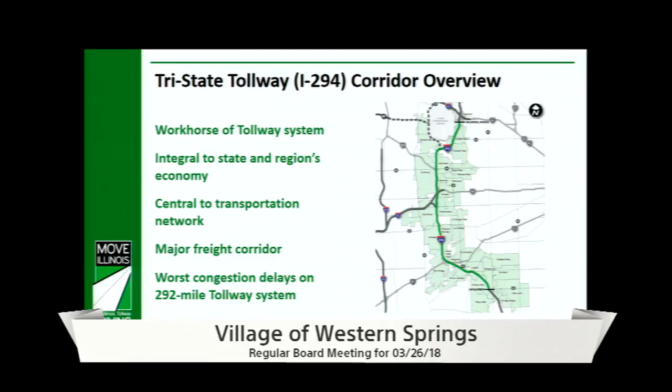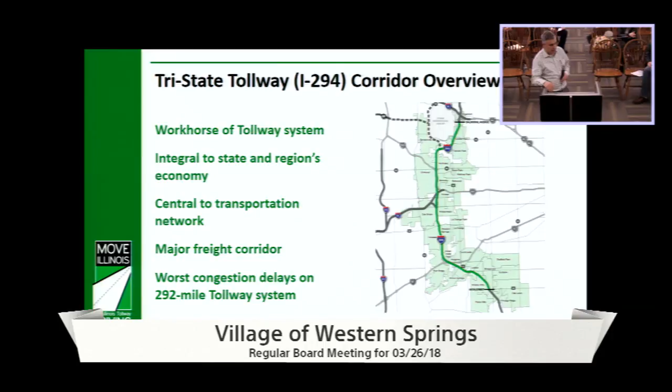You may have heard me say this before, we've done a couple different presentations. This really is the workhorse of the tollway system. This Interstate 294 is by far the busiest road that we have on the entire tollway system. It's really integral to not just the tollway but also to the region, as growth continued to happen, post-war growth continued to happen further and further west. This road really became the lifeline to a lot of different communities, connecting up Midway at the south end, O'Hare at the north end. We've got multiple rail intermodals up and down the entire corridor, I believe 4 different rail intermodals. It's definitely very important and integral from an economic development standpoint.

Outside of the city of Chicago, you've got some of the biggest job creators right along Interstate 294, with Oak Brook, Rosemont, everything near O'Hare Airport and Midway Airport as well.

So very integral to the economy—major freight, with all the freight and the airport through there, it also carries the most amount of trucks that we have on the entire tollway system. So we carry the most amount of passenger cars, the most amount of trucks, and with that we come with the most amount of congestion that we have on the entire tollway system.

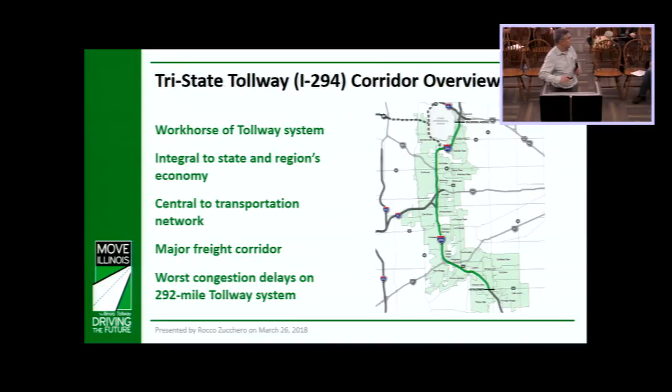So as we started out our planning process, the Tollway Board of Directors, we created a corridor planning council group that got a lot of feedback. The Western Springs was represented on that group. We got a lot of feedback about things that we should be considering as we move forward with the project. Our Board of Directors gave us direction to move forward with a project to look at the long-term vision and long-term solutions of what this corridor is today, but then also what it can be in the future to make sure that we remain vibrant and healthy and support the economy and freight that moves through here.

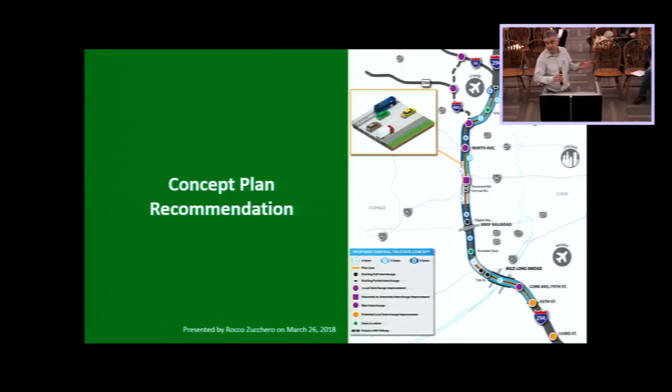So I'll speak to our recommendations that we had on the corridor. I believe this document, or some form of it, is on your website now—it's been out there for a little bit. As we went through the planning process, we wanted to make sure there's the right size solution through here, so it wasn't a one-size-fits-all approach. It's a 22-mile corridor, so there's a lot of different projects within the overall project. I'll try to speak to the whole—I know we try to show a lot on a small picture here, but there's a lot of things happening through here.

The overall project timeline, which I'll hit on later, is from 2018 through 2025. Again, a lot of different projects throughout the entire 22-mile corridor. Throughout construction, we're going to maintain 4 lanes of traffic. That's very important—we don't want to impede the flow of traffic and shift more traffic onto your local roads, the parallel roads through here, Wolf Road, LaGrange Road, and further to the west, 83. So we want to make sure that during construction we maintain 4 lanes of traffic. That really drives the way we have to think about the project as well.

So what we have on the screen is the number of lanes that we're recommending. We worked on adding capacity where it's needed. We worked with CMAP, the Chicago Metropolitan Agency for Planning, the regional planning body, to really look at travel demand and forecast what's out here today, but then also look to the year 2040, 20 years beyond, at what the traffic demand might be, assessing some of those changes. So we came up with recommendations on the number of lanes based on these traffic studies.

But there's also some other projects that drove our thinking. This is a major regional project—we are doing significant improvements at the Interstate 290, Interstate 88, 294 interchange. That's the interchange that just flat out doesn't work; it's where a lot of daily delay happens. It's where trucks basically sit in a U-turn movement—they have to go northbound, U-turn, south, climb. It's a mess for them. The I-88 to Interstate 294 connection is another one that really doesn't work very well. We've got a lot of weaving that happens that really backs up traffic, miles long of backup. So that's a big component that drove our overall thinking as a major investment to fix the I-88, 294, I-290 interchange.

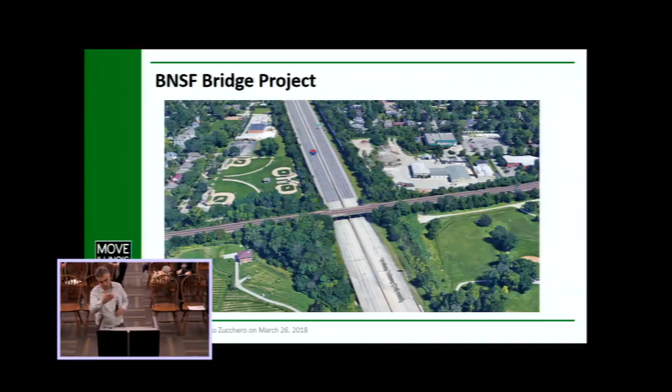That's something we've heard from other communities next to us. So it's an opportunity now to work with the residents to put something back that's more representative or reflective of their concerns. Thank you for that clarification.

Sure. Yeah. Yes. You mentioned the stretch from I-55 to the airport - which end will you start first?

The plan right now is in 2018 - 2018 to 2025 is our overall timeline. I was going to hit this at the end, but I'll jump into it now. We plan on doing 22 miles, with a lot of complex projects in between.

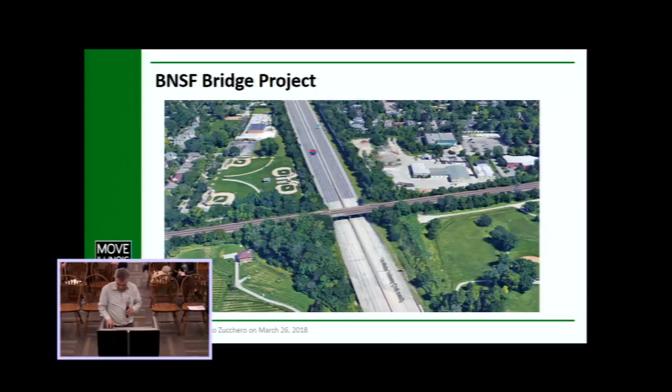In 2018, we intend on working on the stretch from basically North Avenue or North Lake up to the airport, to tie in with our Elgin O'Hare, the 490 interstate through there. So you'll start seeing some activity up at the north end.

The next projects that will start, which help facilitate the rest of the construction, will be the Burlington Northern Bridge and the Mile Long Bridge. Those two elements of the overall 294 project have to get done first to allow us to hit the main line. Throughout construction, we're going to keep 4 lanes of traffic open.

To do that, right now Burlington is the narrowest opening - there are no shoulders, or very minimal shoulders, on either side, so maintaining 4 lanes of traffic there is impossible. Before we can hit the main line portion of 294, that Burlington Bridge has to be replaced. The bridge opening has to be sufficient to allow future travel through there, and also to allow us to shift traffic on either side of the bridge.

The other project that's like that is our Mile Long Bridge. If you're familiar with that, it's the big bridge that goes over basically everything - there's a whole little city underneath, including the Burlington Northern facility, UPS, a bunch of businesses, the Des Plaines River, the I&M Canal, the Chicago Sanitary Ship Canal, all kinds of stuff down there.

So that bridge down at the south end is also a multi-year project. It will be very interesting how we approach that project. Through that area, the road is shifting slightly to the east, because that had less impact on the facilities down below.

We will be building an entirely new bridge off of the tollway system today, to the east or north of where it is today. Once that bridge is built, we'll shift traffic onto it, build a new southbound bridge, and tear the old one down. Once the Mile Long Bridge and the Burlington Northern bridges are done, that allows us to start working on the main line, kind of north and south, in a couple different areas.

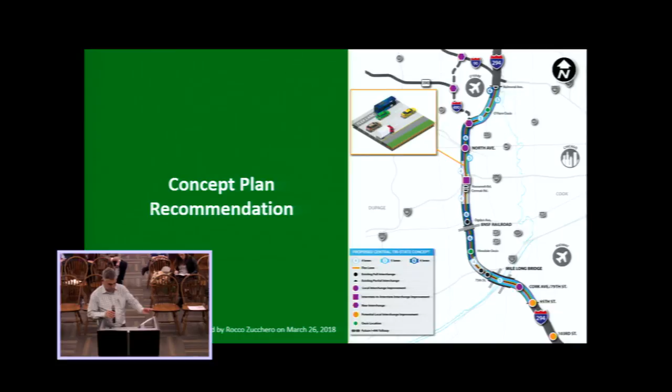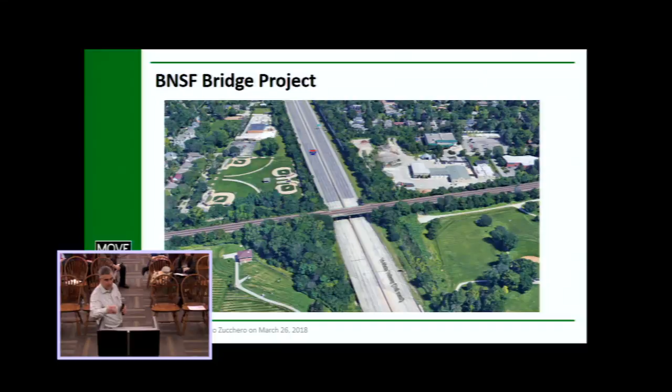So again, we'll spend some time. Dan will walk through the construction staging on the Burlington Northern. Then I'll get back to it and we'll talk a little bit about the impacts, the right-of-way and easement needs through this. Thanks, Robert. Dan?

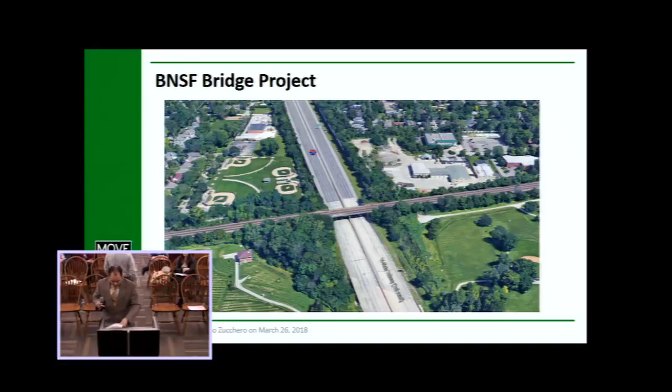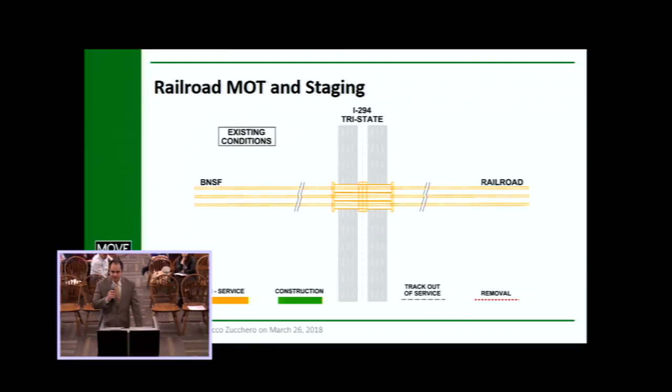Everything's working. All right, thanks Rocco. Again, I'm Dan Felice, I'm with Bowman Barrett & Associates, and our firm, along with many of our sub-consultants, make up the engineering team for the BNSF project that Rocco's been providing the overview on.

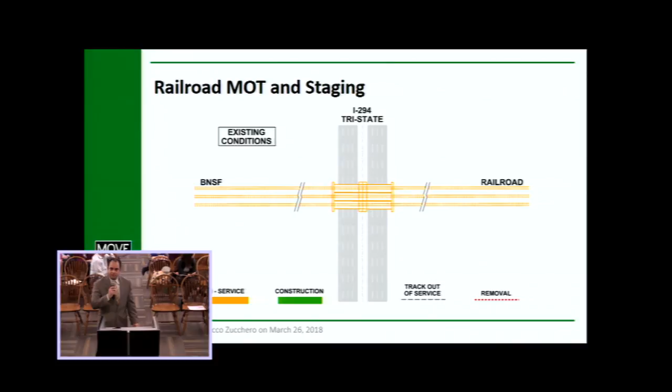Throughout the process, we've been coordinating with the BNSF Railroad, and they've indicated that 3 tracks need to remain active at all times during construction. That is to limit impacts to the commuter rail. We have Metra and Amtrak that use the line, in addition to the BNSF freight lines as well. So this requires multiple stages of construction to occur in order for us to complete the process. We'll go through the steps of these.

The first step is, in order for us to do anything on the current existing track alignment, we need to move the tracks to a temporary position, which we're calling the shoofly alignment. So step 1 would be, we would construct a bridge on the south side of the existing bridge, and place the embankment to allow us to place the tracks on a temporary location. Step one is looking at fall of '19 to about mid to late summer of '20 for that preparation of the shoofly alignment.

Then step two would be the BNSF forces coming in, and they would install the tracks on the shoofly alignment. After the track is completed, we would shift traffic one by one, taking tracks out of service during temporary off-peak hour or weekend time frames, and switch the tracks from the alignment beyond the bridge towards the end of our project limits, connecting them to the shoofly alignment. At the end of stage two, all train traffic will be using the shoofly alignment. The BNSF forces for step two would complete this work from mid-late summer of 2020, where step one ended, to about the winter of 2020.

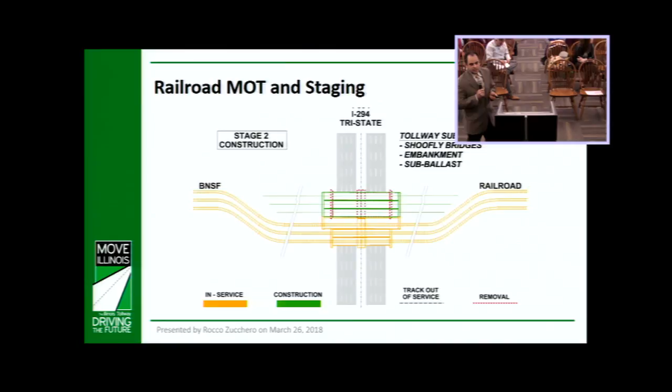After all this is complete, we're able to attack the problem we're here to solve at the beginning of step three. This occurs from winter of 2020 to about late summer of 2021. The existing bridge will be removed, the new bridge installed, and all permanent embankment work along the north side of the tracks will be completed.

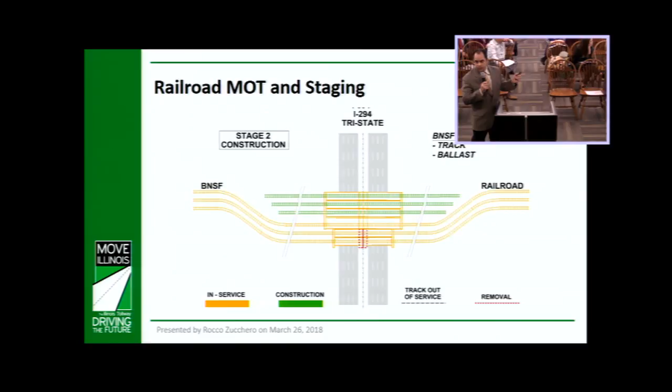Step four: BNSF forces come back from late summer of 2021 to winter of 2021, and they install the tracks again on the permanent alignment. Similar to before, at this stage, one by one, the tracks are moved or connected back from the existing to the new tracks shown in green.

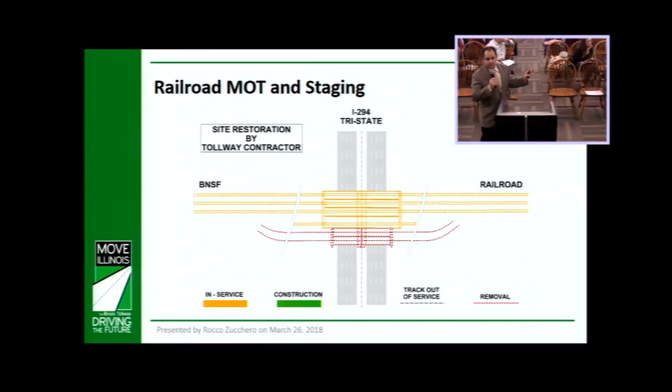That takes us to winter of 2021. Step five is the restoration of the temporary shoofly alignment and removal of the embankment on the south side, along with final landscaping and permanent restorations along the south and both park areas. This is planned for winter of 2021 to late spring of 2022, at which point the project will be complete and ready for the main line.

The end configuration schematic is shown here with the fourth track on the south end, a siding track that BNSF may or may not install at this point. I think that takes us through the staging. Any questions at this point?

You said may or may not install the fourth track—there's a possibility it'll come down? Well, the bridge itself is going to remain. We're using that for one of the temporary conditions, but BNSF will do the track work beyond the bridge.

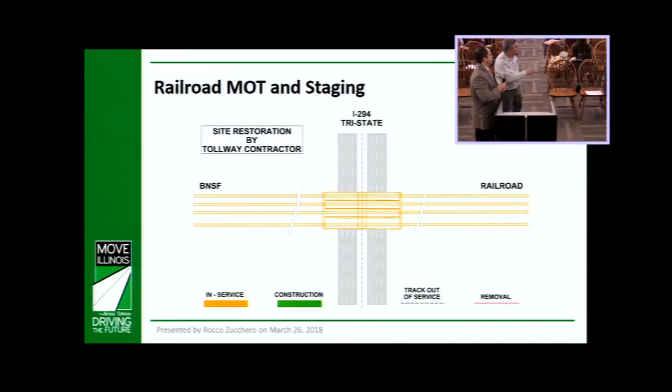To carry on that question, the way it's drawn, that new fourth rail line on the south side would just keep extending from Aurora to Chicago. Is the view that it might connect back into the third? As Dan was saying, it's really up to Burlington Northern what's left behind.

We'll have the bridge itself. Also important, the north line stays the same. If there is a fourth track, the bridge will accommodate it on the south side. What they've talked about, and what we've discussed with Burlington, is that if anything remains, you could see where it ties back in—it would be the northernmost track, somewhere through there, on the green.

Steady hands, right? So there are three tracks here—those are the three temporary tracks. The northernmost of those three tracks is the one that would tie back into the main line portion. But would this fourth track, if it stays, be a separate structure from the new bridge?

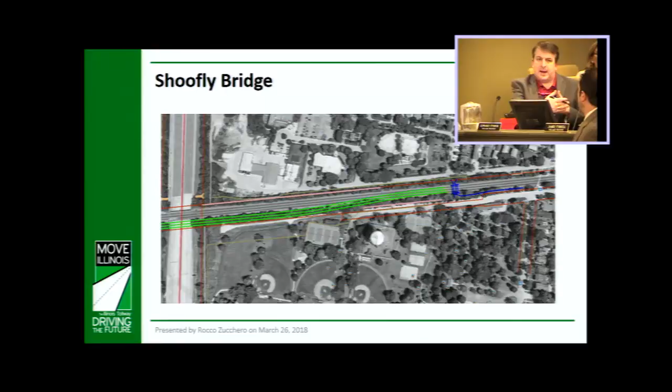It would fit within Burlington's right-of-way, within their embankment. Whatever's left behind is all within Burlington's property. But I was trying to understand—so the new bridge will have three tracks, and this fourth track is a residual of the shoofly, is that correct? Yes. So will it be a standalone structure, or tied into the permanent one? It's tied into the permanent structure. Okay, so it'll look like one structure in the end.

Is it on both sides of the highway? Does the shoofly extend the same length going west? It's equidistant on both sides. The intent is to make sure Burlington could still maintain the same operating speeds throughout construction, so whatever was necessary for that—there was no favoritism shown.

Regarding that fourth line, do you have any information on whether it would be used as a permanent shoofly, giving relief for queuing of trains? Burlington says it's not long enough to queue trains up really through there. What they've expressed to us, and what Burlington will have to answer, is that it's a maintenance-of-way track.

So if they have to do tie and ballast maintenance or rail maintenance, instead of going back into their shop, they may leave something here for a day or two, short term, so their crew could start on site instead of bringing all materials back out—if there's construction in the area. That's how it's been represented to us, how it would be used, not as a railroad siding.

I don't know, the total distance is maybe 1,000 feet or so, 1,200. So it's not that long from a siding standpoint.

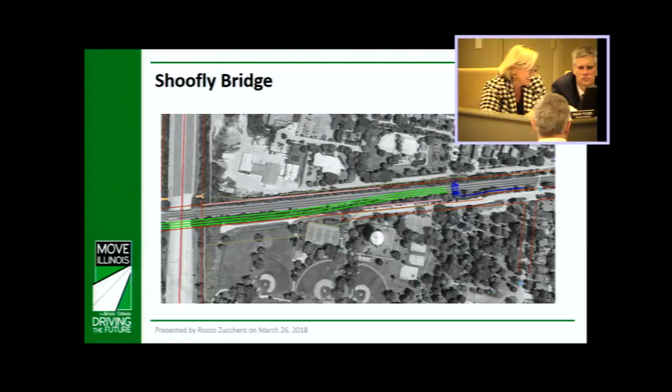I understand there's not enough room to put a freight car or anything like that, correct? So you wouldn't have freight cars sitting up there? You have 1,000 feet to work with, so I don't know what that means in rail car terms. We're highway people, so Burlington would have to address that, but you know how many miles a freight train is. They run in 2+ mile trains. This is 1,000 feet, and there's 5,280 feet per mile.

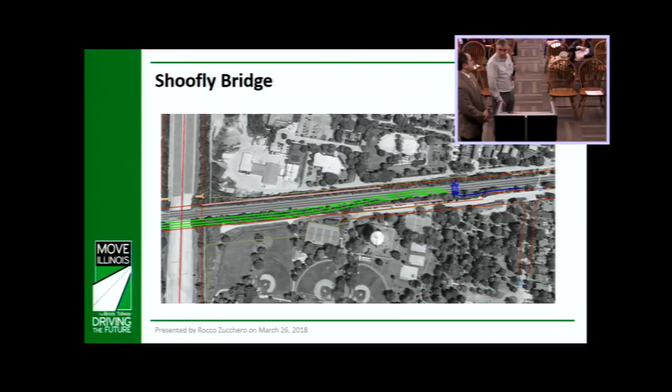So you're saying it's a relatively short 1,000 foot distance from the center of the tollway. So what was the total? It's overall about 1,200 feet, from west to east for this set out. Do we have track stations on both sides, or is that the total? Total. So about 600 feet on either side, roughly.

All right, and it's very conceptual at this point, but the rail alignment and orientation only allows very slow speeds to occur. So the way they explained it to us, they're not looking for it to be used as an additional freight line.

Well, it's sort of more like Village Manager Velking's comment about, is this going to store equipment there for a long time? Because our main park is right there.

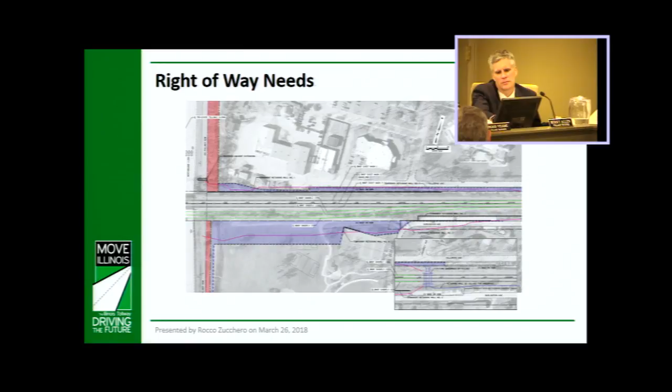Burlington's gonna have to answer those questions. We had a meeting in the field, I don't know, some long sunny day a while ago, and that concern was expressed by both communities - what's gonna be stored there, how long it's gonna be stored there, because as you well know, there's parks on both sides.

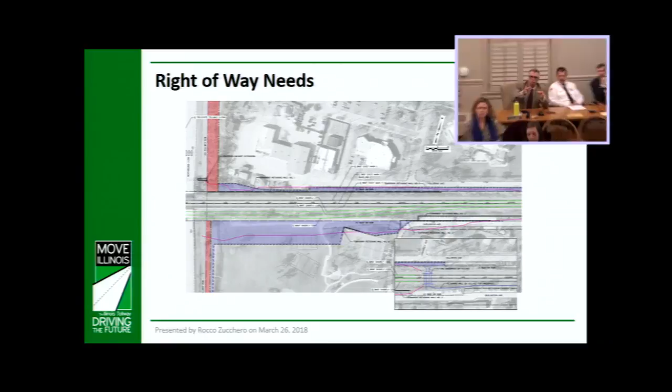Burlington heard that. Rocco, could you please explain the historic relationship between the toll road and the Burlington, and how this works? So we have an agreement that the tollway signed back in the 1950s. Basically, what it says is whatever the Burlington wants, the tollway is responsible for building it.

So the tollway's responsibility for this construction is to build the bridge, the bridge structure that goes over the tollway. Outside of that, it's really the Burlington that drives everything after that. What they want to have left behind is their decision. We are just building the physical bridge infrastructure, and anything permanent that I showed here has to fit within the Burlington right-of-way.

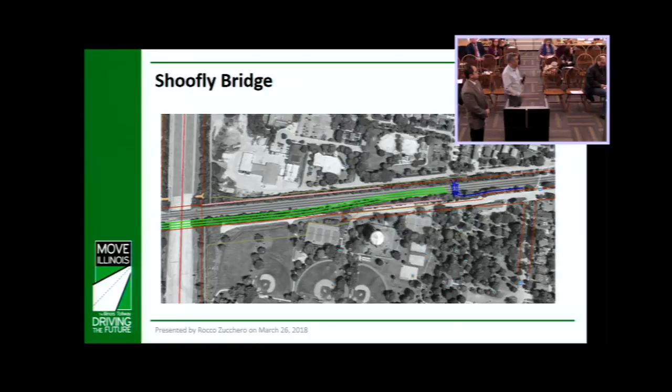And when you say the Burlington right-of-way, you mean their existing right-of-way? No expanded right-of-way, correct? No expanded right-of-way. So whatever they have fits in here. Is that what you're thinking of, Josh?

Dan or Rocco, can you tell me how much land you're going to temporarily use in the park? I couldn't tell from that last slide, this blue slide, how far into the park on the north side that's taking. Dimension-wise, do we know what that is?

The bottom blue corridor, south end of the park but on the north side of it - I hate to give misinformation if we don't have the dimensions, but I'd say it's about 60 feet. To clarify, that's a temporary easement for construction purposes.

On this plan, the blue shows temporary easements, and the red shows proposed right-of-way or permanent easements. The temporary easements are largely to allow that temporary bridge to be built, and to make sure construction vehicles have access to the site on and off from just the tollway instead of coming through the village side. Those impacts would be temporary - we would acquire it for typically a 5-year period, but the construction duration would be through spring '22 when final restoration would occur.

So the fields would be probably fine, and the intent is also to make sure - as we've been talking to the Park District as well - that we avoid the tennis courts through there, given the high usage of the courts.

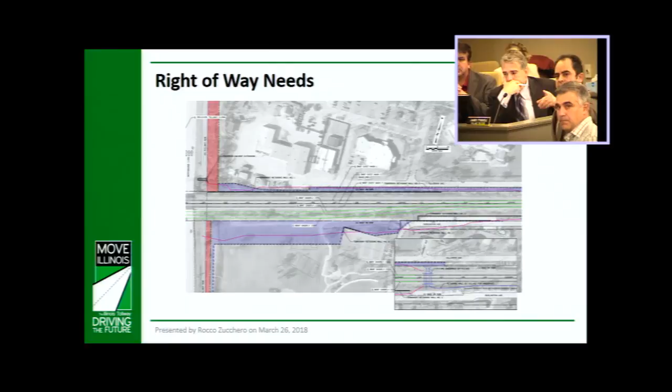Yeah, so basically in each quadrant of the tollway where the red and the blue line meet, right below the BNSF right-of-way line, in that area we're going to have access points for trucks to enter and exit the work site. The temporary grading plan will allow them to use this, like the purple blue shaded area, as a haul road to move material and equipment back and forth within the site, and then enter and exit from the tollway points.

Where that butts up against the park, what sort of barrier will there be to protect through that area? Yeah, we've had a couple of discussions on that. One item raised was to put up fencing with construction mat between it, so you kind of can't see through it, but there's various things we can look into. And also in terms of vehicles perhaps errantly going into the park area, would there be concrete barriers or something along those lines? We don't envision that right now.

What we're looking at is basically a chain link fence with some screening on it. Because it's going to be right there up against the tennis court and things like that. It's a little concerning. Yeah, no, understood.

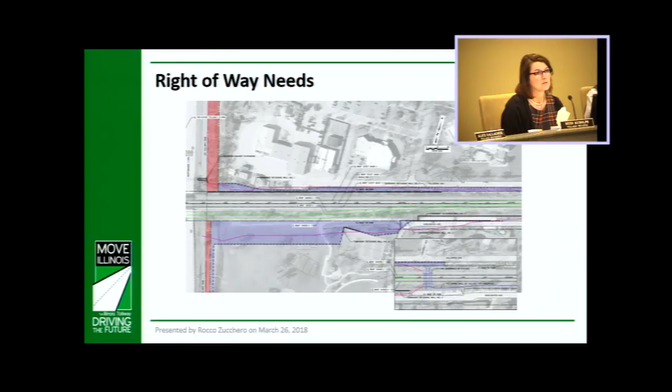And nothing that can help minimize dust during that time period either, right? A couple different things. So we do have dust control plans. I'm going to put that back on Matt and Jeff during construction. That's one thing, dust, that's important for the contractors. So they will have to have a dust control plan. Will there be dust? Absolutely.

But what they are supposed to do is make sure they use proper dust suppressants. There's things that they put on the open materials, or there's a limited amount of time that they could have anything open and exposed as far as dirt. So they'd have to stabilize their construction paths with some kind of stone or whatever it might be, again not to kick up as much dust. So they are responsible for dust control. It will be a problem, but that's what we'll have to make sure that we're hard on our contractors to make sure they're complying with.

I'm thinking of the use of the park with all the kids in the park and then also the nearby residents. Yeah, absolutely, so again we make our contractors do it. We'll have people out there, so if things are going on through construction, you yourself report it back to us. It'll happen, but we want to make sure that's controlled, so there's provisions in place for dust control.

I had a question about- Heidi Rudolph. Right, right. Yeah, I live close by. The hours of construction as well? Typically we'll be following your ordinance.

What we might be doing though, as Dan was saying, to minimize the impact, I'm just going to speak for you because I don't know this for sure, but I'm pretty sure this is what's going to happen. Because when we're taking the Burlington tracks down, it might have to be overnight or a weekend or something like that, right? That's the reality of it. So 90-some-odd percent of our work will follow your construction ordinances that you have in town. But if there's something we have to do that is really night-driven, we want to do things when there's minimal train traffic and minimal roadway traffic. So we'll do those things overnight or things like that.

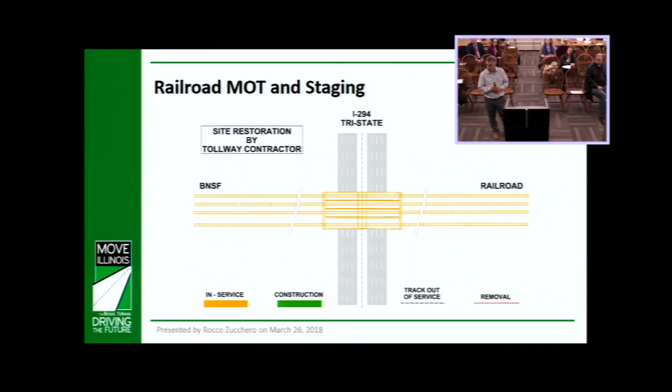There was a big purple area on the north side of the track on the next slide, going all the way out. What's all that? Those are temporary easements, necessary to allow access from the tollway.

They also allow the temporary grading to be in place, not only to support the embankment, but we'll have temporary areas where the railroad requires flatter platforms or work areas so they can move the tracks over with their equipment, since some tracks can't be built by hand and need to be dragged over. So that area on the north side, there are still alternatives we're investigating for the final condition, but it all reverts back to the original footprint on the north side.

How far east does that go? I'm not mistaken, the sidewalks are on the south side now, we're going to put them on the north side. That's what we looked at too, some options we're considering, so we haven't completed the final layout of that north side yet.

There was a question of how far it goes. That bottom image shows how far it extends. Yeah, that's basically it, essentially just past Prospect, roughly 100 feet east of Prospect.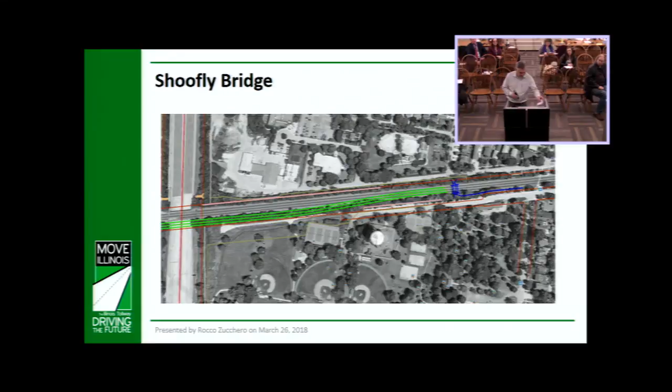Right - any other questions? Any other comments? So really briefly, if I can, any other questions on it? I was wondering, Walt Nackey is here from the Park District - did you want to say anything, Walt?

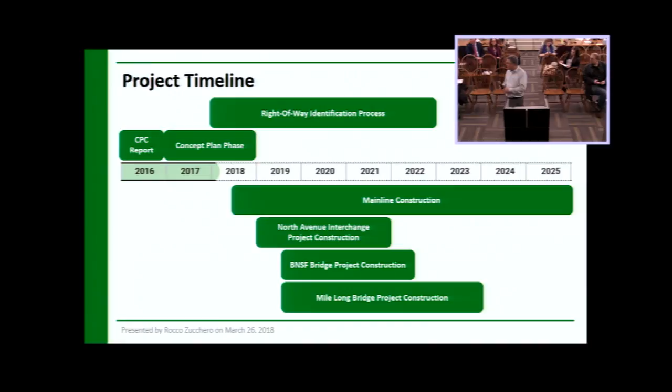Curious - one is, you mentioned vibration. Well, can you come up please and use the microphone? So the people at home can hear you. Yeah, I'm Walt Nackey, Executive Director for the Park District.

We've been meeting with Nikki and team on this project several times. We're now collaborating with the village, as you know, Alice. But one of the questions we have is about vibration being monitored, but noise has got to be monitored as well. There's going to be a huge issue with park enjoyment. One of the things we know as residents and patrons in our parks is they like peace and quiet. Now you've got rails and trains moving much closer to where we enjoy our parks. So that's paramount for us.

The second question I would have from the Park District is what's the speed of those trains - will they be diminished in this shoofly? No, they will remain the same. Whatever it is today, they will remain that same speed.

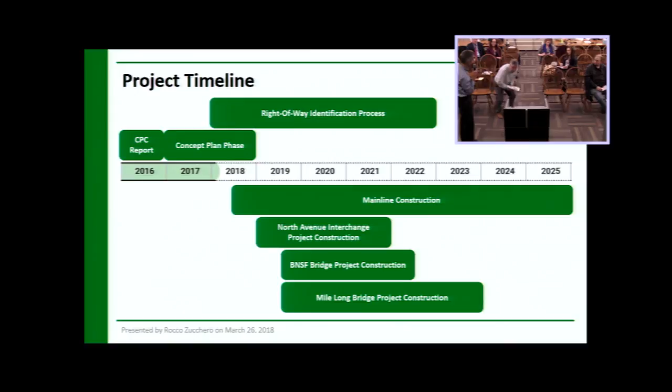The other huge issue here is about safety, egress and ingress - getting in and out of the park, which we've had issues with over the past several years. If there are construction trucks in that purple area where the easement is, you could see a blockage of not only our children, our coaches, our soccer players all trying to get out, because we may have a storm warning or a serious weather issue. And the only way to get in and out of this park is that road right there.

Yeah, that's it. So there's going to have to be very close monitoring of what trucks are there, when are they there, and do we have access when all these kids are in our parks? Thousands of kids are in there.

So throughout construction, the intent was not to have any construction vehicles doing anything through here. The wide swath of route is to make sure the trucks could get on and off the tollway without encroaching upon that area. So this will be an access-controlled area through here, and your access out of your park will always be maintained. It's paramount. We can't take any risks.

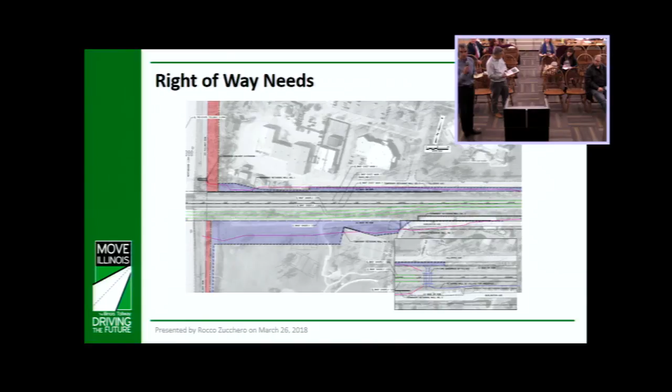There's both blue and red stakes. The red represents the permanent easement or the taking that will take place. The blue represents the easement, the temporary easement that they talked about through 2022, okay?

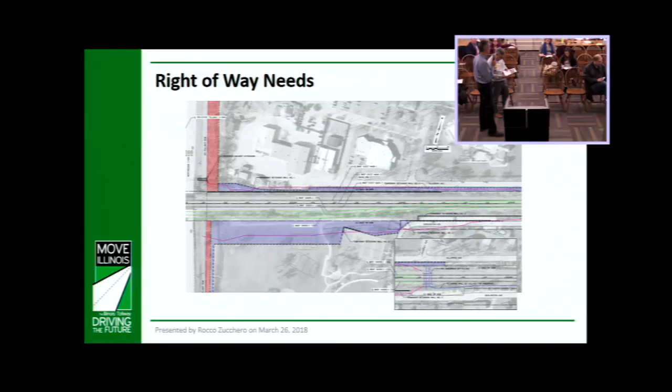But what we would want to consider, because of the noise and because of the disruption to one of our key patrons, when that's tennis, is some type of sound barrier during construction too. So that's got to be on the list. There's a couple other things, but I won't go any further. Is that fair enough, Alice? Sure. Okay, any questions about the Park District at this point?

Thank you, I have another question. For Rocco—what kind of access control measures do you have for the entry into this area off of the northbound tri-state?

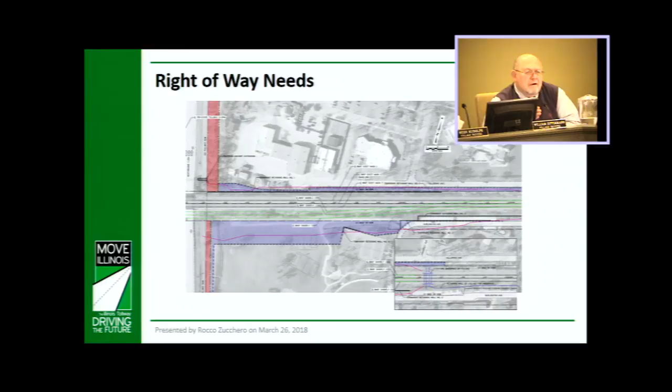So the access off of the highway into this area, are you going to have someone posted there during construction? What we'll likely have is the work zone also barrier separated, so along the existing shoulders we'll have some kind of barrier for a protected work zone. So any contractor who wants to enter the site is going to have to deliberately turn into a work zone.

Well, is there going to be a post there for someone checking? Do we typically put somebody stationed out there for traffic at night? Somebody wandering off the highway—is there a gate or something at night?

The work zone entering there, the existing tollway ditch, we're going to utilize that area for the contractors, modifying it to create a nice platform for them. But there's going to be standard traffic control devices used on all the tollway projects to delineate the work zone and provide contractor access for the duration.

Well, how do you defeat the non-contractor access that may occur, for purposes that might include taking some of the construction material?

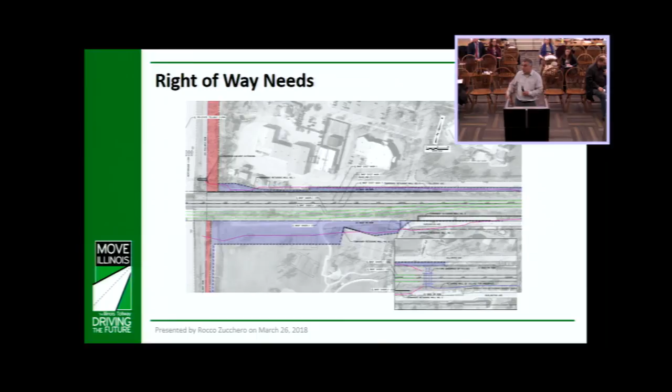You do what you can on fencing. It's not going to be easy for somebody to get into that site. It's pretty typical of what we've done on all our construction sites—you're not going to get in at full speed. As our contractors are getting ready to approach the construction work zone, we'll have flaggers letting people know to slow down, somebody's coming in. It's not like an exit ramp, more of a forced turn from the interstate. We haven't had any issues like that, typically contractors move quickly.

I would just ask that you consider the access to that area during non-work hours by individuals not authorized to be there. Is your concern that our law enforcement would need to somehow police that area? I'm not saying that would be our responsibility—I'd look at it not as police work but as some kind of barrier or barricade, something to basically fence that area off so nobody can get in during off hours.

You had mentioned access control measures, and I wondered what that included. That was the purpose of my question, breaking a barrier wall. That's a good point, we could put some kind of type 3 barricade, something through there.

Where's the entrance on the north side of the bridge? Have we decided where any of those entrances are even going? We're not at that point yet. It would be probably closer to the public works facility. Oh sure, the closer to the work zone as possible is what we would want.

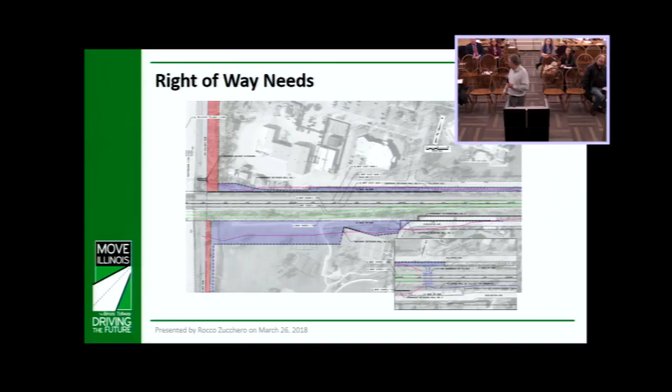Unless anybody tells me we should be looking at that—that's something we've done with other park districts before. That would be much appreciated if you could take a look at how that could improve, though those improvements are going to require more temporary use of parkland or whatever it might be. We'll also have to look at the drainage—I think you've got some squishy soils out there, if I'm not mistaken.

The squishy soils may not be so bad—maybe it's an unusable portion of the park, or maybe there's some other use for that, but we could certainly look at it. Okay, that would be much appreciated.

Speaking of squishy soils, what's the plan with Flag Creek? Well, in general, you're adding two more lanes of impervious surface—what's going to improve the flow of water through Flag Creek? I know we're doing some drainage modifications of the creek itself, fixing some of the culverts. What's been brought to our attention is the flow coming from north to south through there.

We're working on some improvements through there—it's got kind of stagnant water, if I'm not mistaken, so we're trying to enhance the flow and figure out how we can get that to continue to move.

The detention pond plan throughout is going to help compensate for the impact on Flag Creek—we're required to have no additional flow. For first flush runoff, our intent is to make sure that any of that rainfall is captured and held before it enters any of the waterways. That's part of our drainage design and criteria, and we are looking at opportunities for additional detention, because any new impervious surface we put down cannot introduce more water into the waterways than is already out there today.

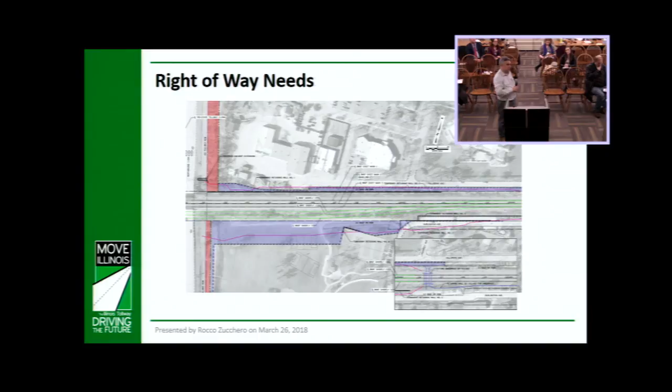So you've got MWRD, but this particular one is Flag Creek—we're working with all the different partners, MWRD and Flag Creek, and then we do a lot of the analysis ourselves. One more question about noise, back to the bridge being taller with the pitch going further into the village—who has the input and the obligation to landscape that, and do we have a say in what sort of additional natural landscaping is done? Us, yes—we're responsible for it, and that's what we always look for.

You've heard me say this over and over: when it comes down to the final landscaping, absolutely we want your input. I see a lot of green in the drawing, and I'd just like to make sure that actually shows up. Yeah, absolutely, those are good things for us to work on. That's our obligation, let's figure out how to put it back. It's not just what we do during construction, it's what's left behind.

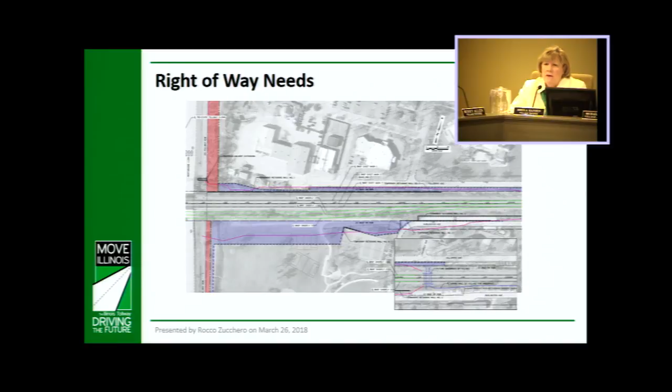Most important, I just have one quick question. I know you stated earlier that this is the workhorse of 294 in this area, but what happens when you get to 95th Street? Is it going to be a congested area then, because the lanes are going to drop down? At 95th, if you're familiar, if you drive down there, the traffic at that interchange itself is terrible trying to get off.

So we're working on that. I'm glad you realized it, because that interchange, we realize that one doesn't work, and it's not just because of the toll. It's because of the Harlem, it's the light, it's the railroad through there. So we're working with the communities of Oak Lawn and Chicago Ridge to look at new opportunities for potential new access, new interchange locations just south of there to alleviate some of that traffic. Cook County's also taking a lead on maybe a reconfiguration at 294 and 95th. Because once you get through that interchange, it flows fine - we don't have a congestion problem down there.

So it's 95th that's our problem. That exit is terrible, yeah.

So if you're familiar with this, let me just hit this really quick. We're looking at a couple different new interchange opportunities. When we're out here spending a lot of money, it's our opportunity to put something back, and put it back the right way. We're looking at trying to fix the 95th Street interchange, opportunities for a new interchange at 103rd Street, just a little bit south, which would give access to Harlem Avenue to get people out of 95th. We're also building a new interchange at 79th Street in Justice.

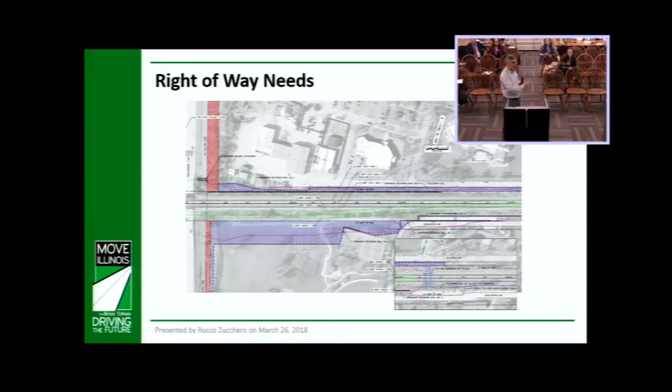Right now, if you know the community of Justice, you just can't get to it. So we're building a new northbound exit ramp to 88th Street, or Cork Avenue - for anybody who's new, we used to have a ramp there that was pulled out. We're building a new northbound exit through there, a new southbound on-ramp, and a new northbound on-ramp at 171st, or Illinois 171, to get back on the tollway. So instead of trying to fix all the congestion problems, we're trying to get people closer to really where they want to be. So providing those exit points in Justice, fixing 95th, and a new exit point further south, we believe that's going to help alleviate some of that congestion.

What the new speed limit will be, or how you're going to approach that - legislation was introduced basically saying interstates would be 70 miles per hour, and we've been pushing back on this. What we will do when construction is complete is a traffic analysis. We're actually revising speeds this week on Interstate 90. After construction is done, we monitor traffic for about a year to see what the average operating speeds are, and we set the speed limit in accordance with what we call the 85th percentile - 85% of the traffic is doing what speed, that's generally where the speed will be set. State law says it shall be something like 70, but we will set it to what the traffic flow would want it to be. So this week we'll be introducing new speeds on I-90, which will increase to 70 miles per hour for a portion of it.

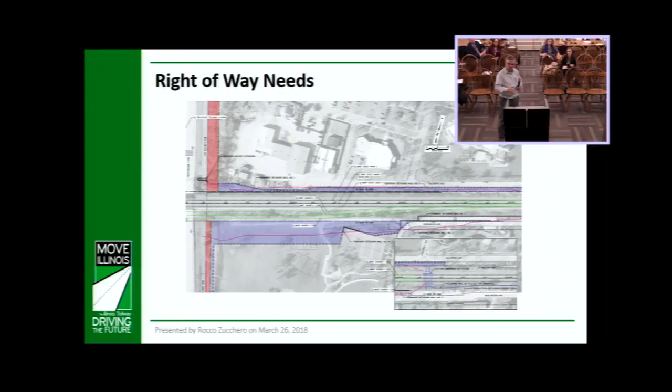This area is a little bit more dense, with a lot more interchanges through there, so the western portion of I-90 is going to go up to 70. The far eastern portion through Des Plaines and all that will remain lower than 70. So that's what we'll have to look at when construction is complete.

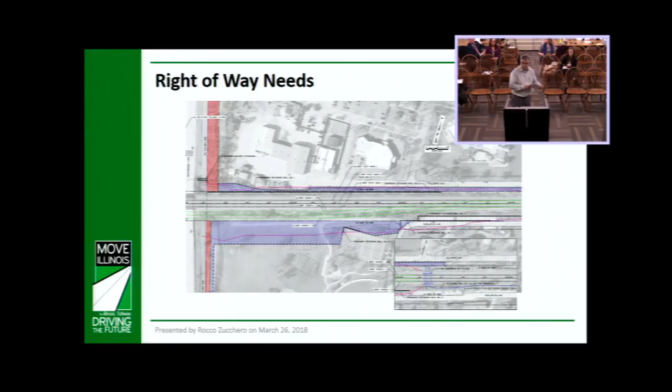Jerry Olszewski, Western Avenue. There's one section in between that there's no wall, from the crossover bridge, the walk bridge, going south a block. I guess it was deemed at the time when the walls were being put up that the berm we had was tall enough to maintain the sound barrier limits. But now that you're going to have two lanes further to the east, is that section going to be filled in? We don't have the answer right now, but we'll be looking at the entire corridor for noise, so that would be one of the areas we look at. I know exactly what you're talking about.

And the walkover bridge is coming down and probably not going to be replaced? We will be replacing the walkover bridge. Somewhere - that's what we want to figure out, where it should go. So it's an obligation of the tollway that we replace the pedestrian bridge. Oh, okay, put it back. So I can't answer your question on the noise, but it's part of the evaluation. Still working on it. Our intent is to do some public meetings probably within the next month or so, and then we'll have more information about the project and a lot more detail on noise.